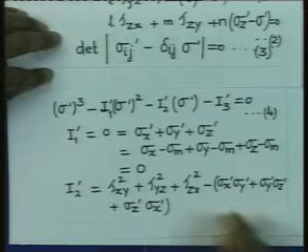Similarly, the other invariant has the form as seen earlier. It is going to be tau xy square, tau yz square, tau zx square, minus sigma x dash into sigma y dash, sigma y dash into sigma z dash, plus sigma z dash into sigma x dash. That is the second stress invariant.

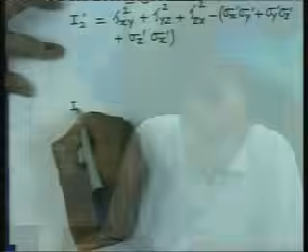And we can now write the other component, I3 dash, equal to sigma x dash sigma y dash sigma z dash plus twice tau xy tau yz into tau zx minus sigma x dash into tau yz square minus sigma y dash into tau zx square minus sigma z dash into tau xy square.

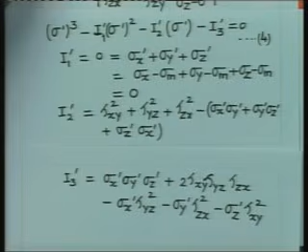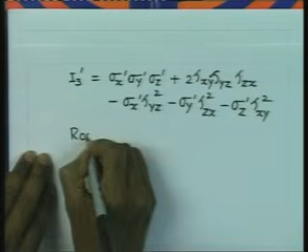So we can solve equation number 4 using these coefficients I1 dash, I2 dash and I3 dash. Since I1 dash is zero, we get some advantage in solving this equation. Finally, suppose the roots are sigma 1 dash, sigma 2 dash and sigma 3 dash, then the principal stresses for the total stress tensor are sigma 1 equal to sigma 1 dash plus sigma m, sigma 2 equal to sigma 2 dash plus sigma m, and sigma 3 equal to sigma 3 dash plus sigma m.

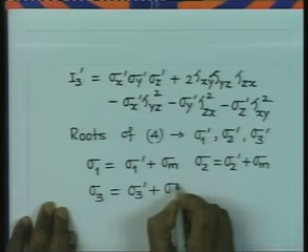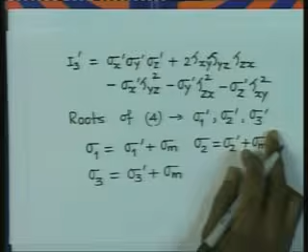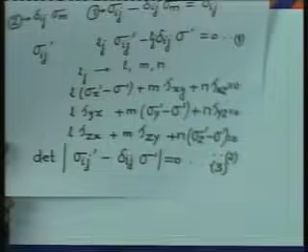After having obtained these three deviatoric principal stresses, you can get back to equation number 2 and substitute the value of sigma 1 dash in these three equations. You can extract the roots L, M and N from these equations to get the corresponding direction cosines, and this can be repeated for sigma 2 dash and sigma 3 dash. So this is how you solve for the principal directions starting from the deviatoric part of the stress components.

Next, we will consider transformation of stress tensor, or transformation of stresses, from one system of coordinates to another. Let us consider that we have three directions like x, y and z, which we can also write as direction 1, 2 and 3. Suppose the stress at a point P is given by the tensor sigma ij, we have 9 components of stresses in 3 dimensions.

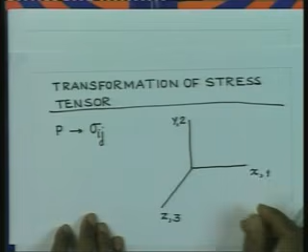Now we would like to transform these stresses to another coordinate system. Let us say we have another set of coordinates given by x dash, y dash and z dash. So if the stresses are given in the system x, y, z, we would like to get the stresses in a system x dash, y dash, z dash, which is arbitrarily oriented with respect to the original system.

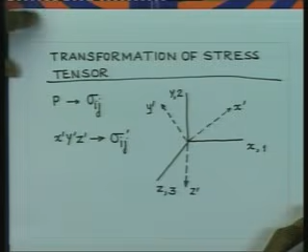Now, in the system x dash, y dash, z dash, we would like to write the stresses by this symbol sigma I j dash. Let us see how we can go about getting these stresses in system x dash, y dash, z dash.

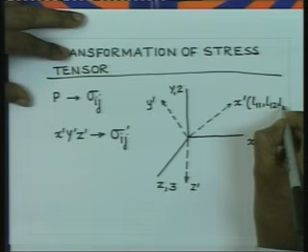Let us write that the direction cosines of the new set of axes: x dash has direction cosines L11, L12, L13, with respect to x, y, z. Also, the direction cosines of axis y dash are L21, L22, L23, and the direction cosines of z dash are L31, L32, L33.

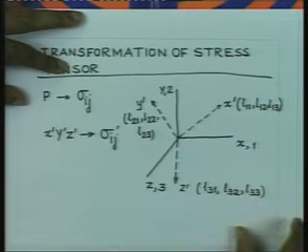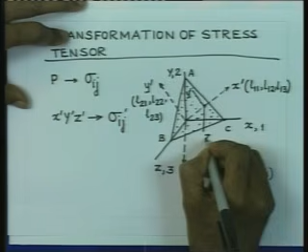Now, if we consider a plane perpendicular to x dash, this is the plane A, B, C, which is perpendicular to x dash. Then we can see that on this plane we will have the axes y dash and z dash lying. So, if this is the outer normal to the plane, then y dash is going to lie on this plane, and also z dash is going to lie on this plane.

Now, we can write the traction on this plane. Let us say S1 is given by L11 sigma x plus L12 tau yx plus L13 tau zx. If we use the index notation, we can write this more simply as L11 sigma 11, L12 sigma 21 plus L13 sigma 31.

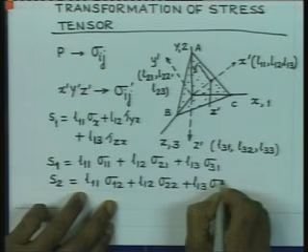The other traction S2 is nothing but L11 sigma 12, L12 sigma 22 plus L13 sigma 32. Similarly, we will have traction S3 equal to L11 tau 13, L12 tau 23 plus L13 sigma 33.

So, these are the tractions on this plane. We are going to have the tractions on this plane such that in the x direction is S1, y direction is S2, and z direction is S3.

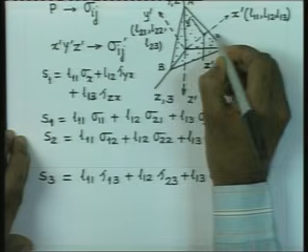Now, we can get the components of these tractions along x dash. If we consider the component of these tractions in the x dash direction, that will give us the normal stress in the x dash direction. So, we get stress sigma 11 dash, which is nothing but L11 S1 plus L12 into S2 plus L13 into S3.

If we substitute the values of the three tractions, we get L11 times L11 sigma 11, L12 sigma 21 plus L13 sigma 31, plus L12 times L11 sigma 12, L12 sigma 22 plus L13 sigma 32, plus L13 times L11 sigma 13, L12 sigma 23 plus L13 sigma 33.

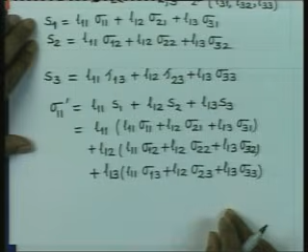So, this gives us the expression for the normal stress on the plane perpendicular to the new axis x dash. Similarly, after having got this stress in this direction by taking the components of the three tractions, we got sigma 11 dash.

Similarly, if we take the components of those tractions in the direction y dash, that will give us the stress sigma 12 dash. For convenience, this is sigma x dash, and this is tau x dash y dash. This will be given by using the direction cosines of y dash, which is this set: L21, L22, L23.

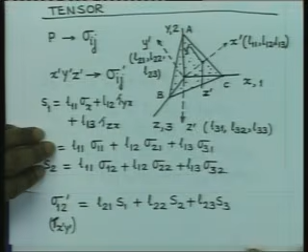So, the component sigma 12 dash is nothing but L21 S1 plus L22 S2 plus L23 S3. Substituting the values of the three tractions, we get L21 times L11 sigma 11 plus L12 sigma 21 plus L13 sigma 31, plus L22 times L11 sigma 12 plus L12 sigma 22 plus L13 sigma 32, plus L23 times L11 sigma 13 plus L12 sigma 23 plus L13 sigma 33.

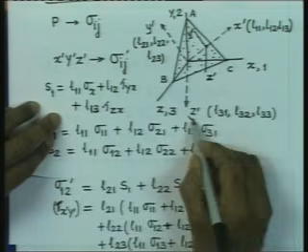So, we can get the stress component sigma 12 dash. You should have no difficulty appreciating that if we want the component of stress in the z dash direction, we can use the direction cosines given by that set, which will give us the component sigma 13 dash.

Now, all these can be written very conveniently by making use of the tensor notation, and it will finally give us that all these components can be written in this form: it is nothing but sigma mn.

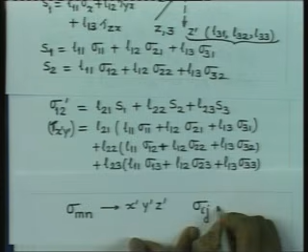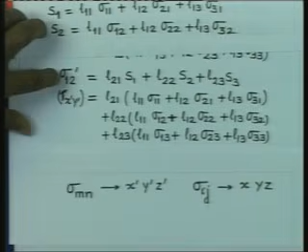Suppose these are the stresses in the new system x dash, y dash and z dash, and we have the original set given in sigma ij, in the system x, y, z. Then we can write the connectivity between the two sets using the earlier expressions in a compact, generic form.

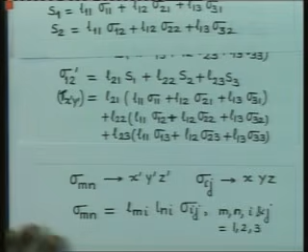Sigma mn is equal to L mi L nj sigma ij, wherein m, n, as well as i and j, take up values 1, 2, 3. So this is the transformation rule for a second rank tensor: sigma mn is equal to L mi into L nj into sigma ij.

Now I would like to illustrate this with some examples. Suppose we want to write any set like this. Let us consider an example where we are interested in getting the new value of, say, stress 2,3. Our original set is given, and sigma 2,3 new is what we want to find, given these values.

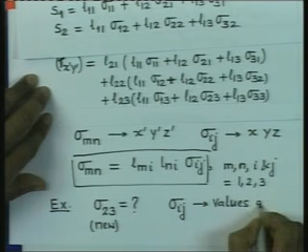Again we make use of the fact that the new set has direction cosines given by L mn, the direction cosines of the new set.

So I can now write sigma 2,3 is equal to L 2i L 3j sigma ij. This can be further expanded: the value of i varies from 1 to 3, and j also varies from 1 to 3. This repetition of indices indicates that summation is implied.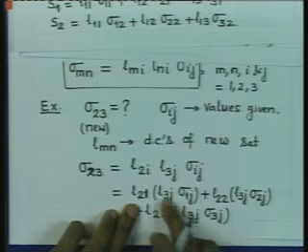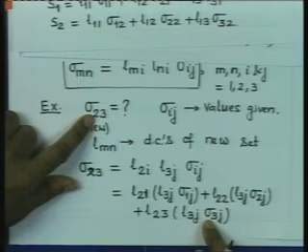Taking i to change first, we can write this as L21 into L3j sigma 1j, plus L22 L3j sigma 2j, plus L23 into L3j sigma 3j. These bracketed quantities are nothing but the tractions on the plane perpendicular to direction 3, so we can expand it further.

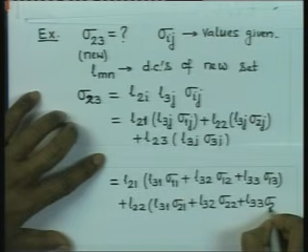This is L21 into, now j takes values 1 to 3, so it becomes L31 sigma 11, L32 sigma 12, plus L33 sigma 13, plus L22, L31 sigma 21, plus L32 sigma 22, plus L33 sigma 23, plus...

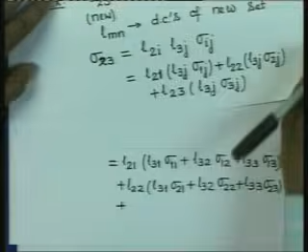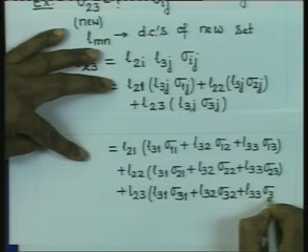...L23, L31 sigma 31, plus L32 sigma 32, plus L33 sigma 33. So you can go on writing the value for the stress component sigma 23 in the new system from the old system, knowing the direction cosines of the new set of axes.

Now we would like to consider another example to make you comfortable with the transformation. Let us consider an example where we are interested in the stresses in two dimensions, given in the system x, y.

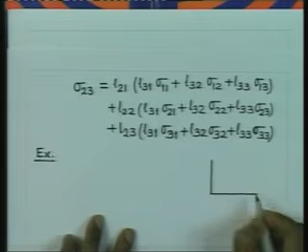We consider the new directions: let us say this is the new direction 1 dash, and this is direction 2 dash. So this direction 1 dash makes an angle theta with the x direction.

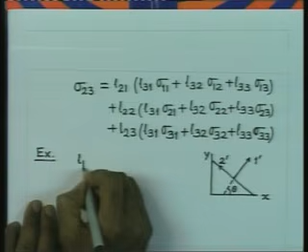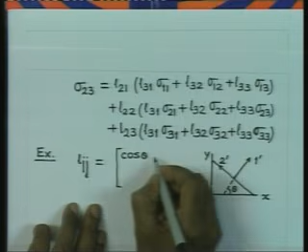So we have the direction cosines Lij given by: the direction cosine of direction 1 dash is cos theta, sin theta, and the direction cosine of direction 2 dash is minus sin theta, cos theta. Since this is a 2 dimensional problem, i and j take up values 1 to 2.

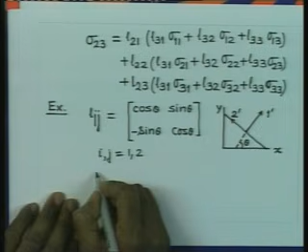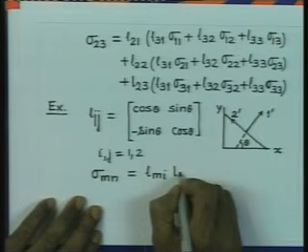Now the transformation rule is sigma mn equals L mi L nj sigma ij.

Let us find out the component sigma 1,1. So sigma 1,1 dash is nothing but L1i L1j into sigma ij.

So this is given by, taking the value of i to be 1: L11 into L1j into sigma 1j, plus L12 L1j into sigma 2j.

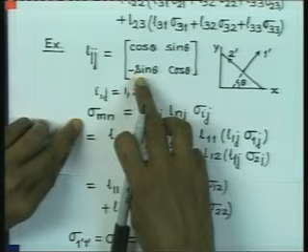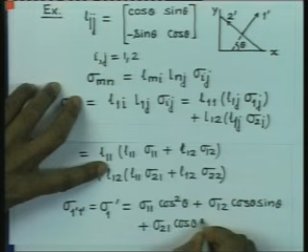So, we will now represent the stress sigma 1 dash as sigma 1 dash, using the matrix with L 11, L 12, L 21, L 22. Substituting the values, this is sigma 11 cosine square theta, plus sigma 12 cos theta sin theta, plus sigma 21 cos theta sin theta, plus sigma 22 sin square theta.

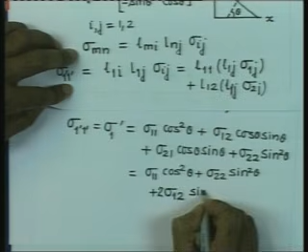This finally is nothing but sigma 11 cos square theta plus sigma 22 sin square theta, plus, since sigma 12 is equal to sigma 21, we can write this as sigma 12 twice sin theta cos theta.

This can finally be written that sigma 1 dash is, if we write cos square theta equal to 1 plus cos 2 theta by 2, and sin square theta as 1 minus cos 2 theta by 2, given by sigma 11 plus sigma 22 by 2, plus sigma 11 minus sigma 22 by 2 cosine 2 theta, plus sigma 12 sin 2 theta.

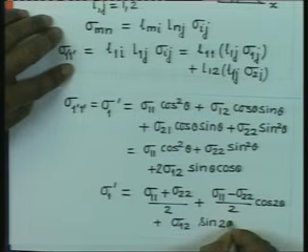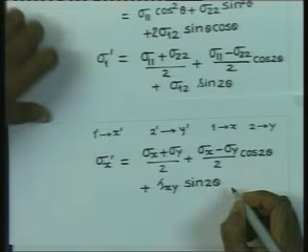So, sigma 1 dash is given in this form, and if we write it in the xy system, representing 1 dash by x dash, 2 dash by y dash, and 1 by x, 2 by y, we can write the expression as sigma x dash equals sigma x plus sigma y by 2, plus sigma x minus sigma y by 2 cosine 2 theta, plus tau xy sin 2 theta. This is the transformation considered in relation to Mohr's circle in 2 dimensions.

Similarly, if we now consider the other stress component, we would like to consider the component of the stress in the direction 2 dash. This is the plane we are considering, and this direction is the outer normal. So, now we get the component sigma 1 dash 2 dash, which is equal to, with m being 1 and n being 2, or 2j.

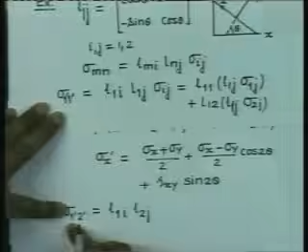This is how we link the new system to the old system, and again we expand I first. So it is L 11 L 2j sigma 1j plus L 12 L 2j sigma 2j.

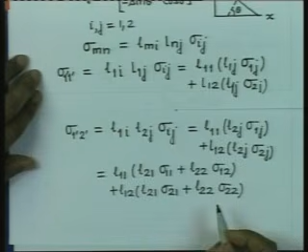Now we can write L 11 L 21 sigma 11 plus L 22 sigma 12 plus L 12 L 21 sigma 21 plus L 22 into sigma 22. So all 4 components of stresses are now involved, sigma 11, sigma 12, sigma 21 and sigma 22. Now we try to collate them, noting the values of the direction cosines given earlier.

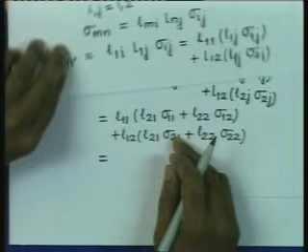So we will have: this is cos theta, this is minus sin theta, so it is minus cos theta sin theta sigma 11, plus, this is cos theta, this is cos theta, so it is cos square theta sigma 12.

And this is again L 12 is sin theta and this is minus sin theta, so it is minus sin square theta sigma 21, plus, here L 12 is sin theta and this is cos theta, so this is sin theta and this is cos theta, giving cosine theta sin theta sigma 22.

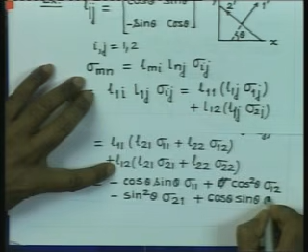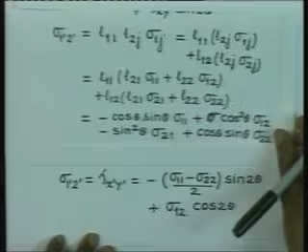So we can now write sigma 1 dash 2 dash, which is nothing but the shear stress, and this is going to be minus sigma 11 minus sigma 22 by 2 sin 2 theta, plus, since sigma 12 is equal to sigma 21, we can write this as sigma 12 cosine 2 theta.

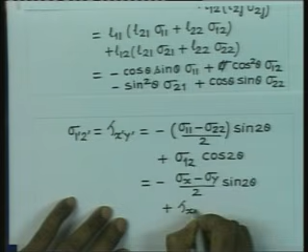So this is the expression for the shear stress in the new coordinates, and if we want to write it in terms of sigma x and sigma y, this is nothing but minus sigma x minus sigma y by 2 sin 2 theta plus tau xy cosine 2 theta.

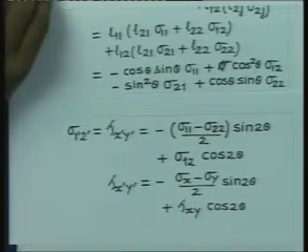So, the new shear stress is given by this, and this is what you have obtained in connection with the Mohr circle diagram in 2 dimensions.

Just finally to look at the expression for the transformed x dash, and the shear stress is like this. If you are interested in finding the stress sigma 2 dash, which is nothing but sigma y dash, we can make use of the stress invariant: I1 minus sigma x dash, which is sigma x plus sigma y, minus sigma x dash. The stress invariants are the same.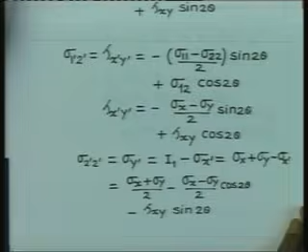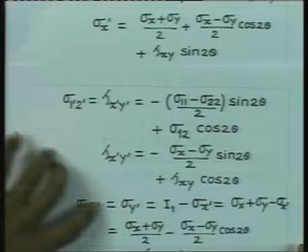So therefore, we can make use of the fact that sigma x dash plus sigma y dash equals I1, and that gives this. Finally, if you substitute the value of sigma x dash, it comes out to be: sigma x plus sigma y by 2 minus sigma x minus sigma y by 2 cosine 2 theta minus tau xy sin 2 theta. So that is the sigma y stress. Finally, your new stresses are given: sigma x dash like this, sigma y dash given here, and shear stress is given.

Now we would like to consider how to draw the Mohr circle for stresses in 3 dimensions. You are familiar with the Mohr circle in 2 dimensions, so we will now consider the construction of the Mohr circle in 3 dimensions.

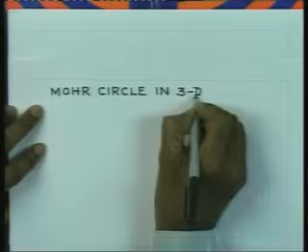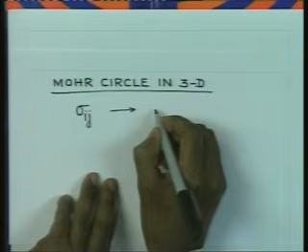We have the stresses at a point sigma i j. Starting from these stresses, you must calculate the principal stresses sigma 1, sigma 2 and sigma 3. You can also calculate their directions.

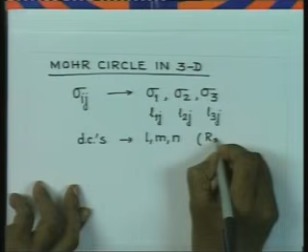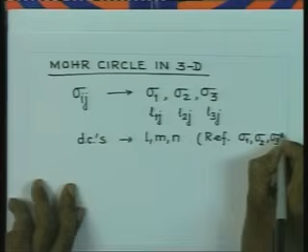Now we would like to consider an arbitrary plane with direction cosines L, M, N, and the reference directions are sigma 1, sigma 2, sigma 3. On this plane we will have the normal stress given by L square sigma 1 plus M square sigma 2 plus N square sigma 3. We also have the relation that L square plus M square plus N square equals 1.

So if I substitute N square equal to 1 minus L square minus M square, that gives sigma equal to L square times sigma 1 minus sigma 3, plus M square times sigma 2 minus sigma 3, plus sigma 3. Let us consider this relation to be equation 1.

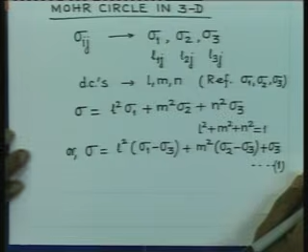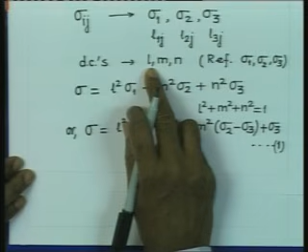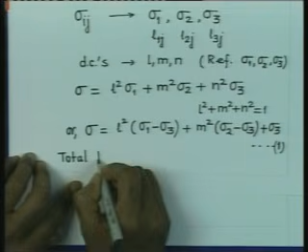Now the tractions on the plane L M N are given by L sigma 1, M sigma 2 and N sigma 3. If we now consider the total traction S, related to S1, S2, S3, the three tractions on the same plane, the relationship is S square equals S1 square plus S2 square plus S3 square.

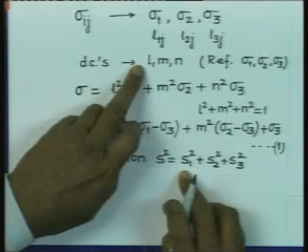Since S1 is L into sigma 1, S2 is M into sigma 2, and S3 is N into sigma 3, we can write S square as L square sigma 1 square plus M square sigma 2 square plus N square sigma 3 square. This type of relationship we have also derived earlier in connection with the determination of the maximum shear stress and shear stress directions.

Now, since the normal stress on the plane is sigma, and if we consider the shear stress on the plane to be tau, then S square is also related to sigma square plus tau square. Therefore tau square plus sigma square equals L square sigma 1 square plus M square sigma 2 square plus N square sigma 3 square.

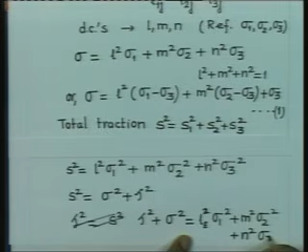Again, we will substitute N square in terms of 1 minus L square minus M square. So we get tau square plus sigma square equals L square into sigma 1 square minus sigma 3 square, plus M square into sigma 2 square minus sigma 3 square, plus sigma 3 square.

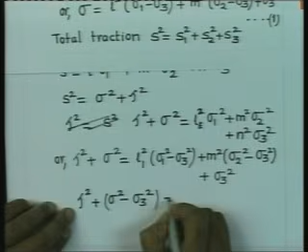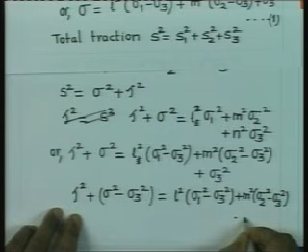So this we can now rearrange. Tau square plus sigma square minus sigma 3 square equals L square into sigma 1 square minus sigma 3 square, plus M square into sigma 2 square minus sigma 3 square. Let us write this equation as equation number 2.

I will show you that these relations 1 and 2 are the basis to draw the Mohr circle in 3 dimensions in my next presentation.